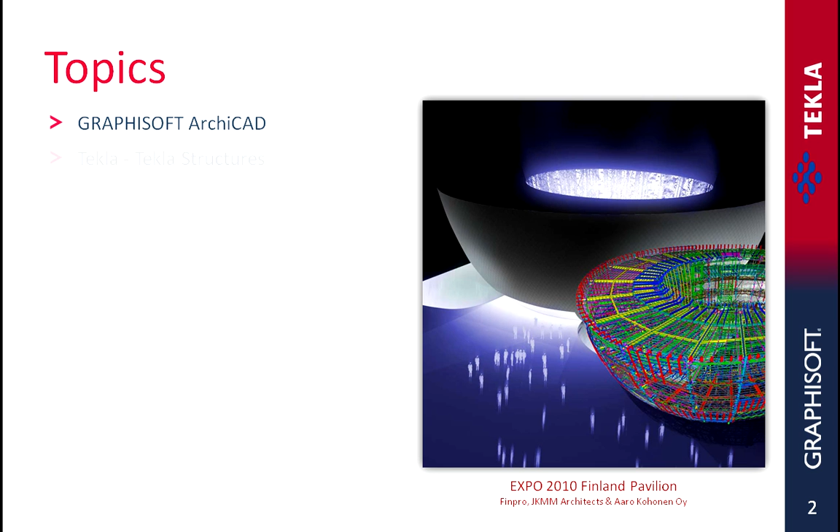Welcome to the GRAPHISOFT Tekla joint presentation. In this presentation, you'll discover how architects and engineers can exchange building design information, share and manage changes, and create professional, fully integrated construction documentation.

GRAPHISOFT ArchiCAD. GRAPHISOFT was founded in 1982, over 25 years ago. ArchiCAD 1.0 previously implemented the virtual building concept. Today, this is known as BIM, that is, Building Information Modeling. Virtual building, or BIM, projects are better designed, more predictable to construct, and less expensive to operate. Over the last 25 years, over 1 million building projects worldwide have been designed and realized using ArchiCAD.

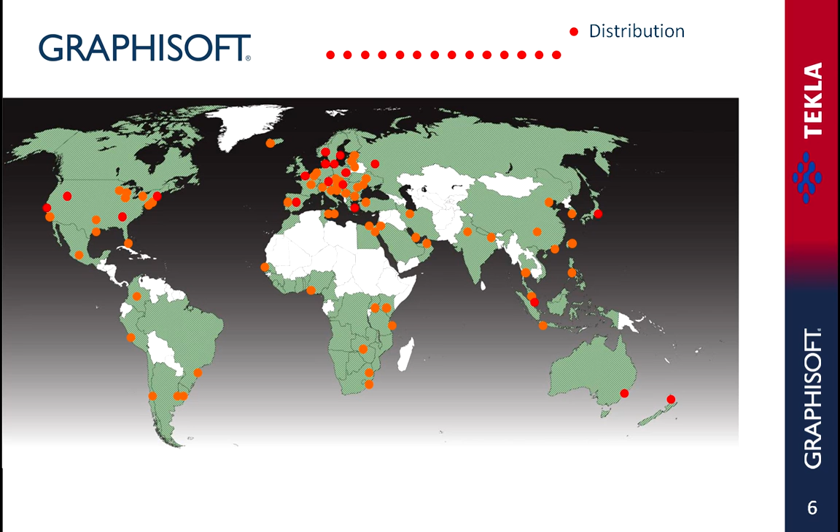GRAPHISOFT is represented worldwide, and ArchiCAD is distributed in 102 countries, is available in 17 languages, and in 25 localized versions. ArchiCAD runs on both Microsoft Windows as well as Apple Macintosh operating systems. We put great effort in providing a high-end software solution for design professionals. ArchiCAD provides fully integrated building information modeling, design evaluation, and documentation workflow.

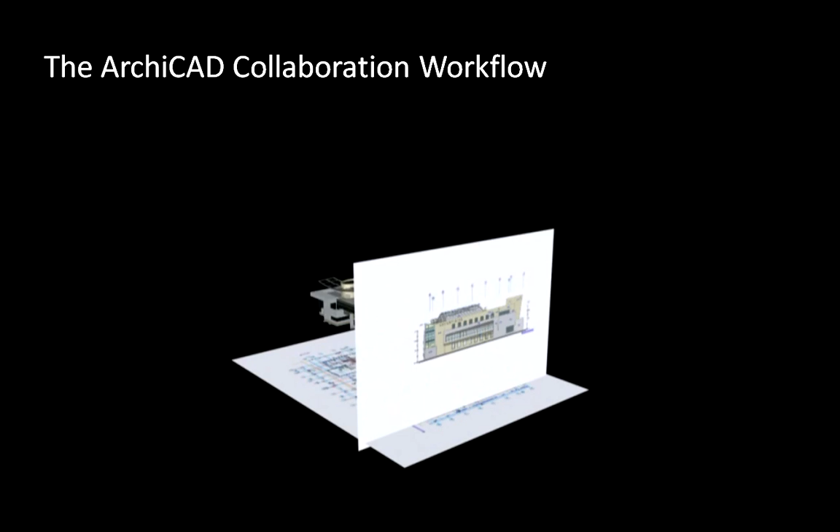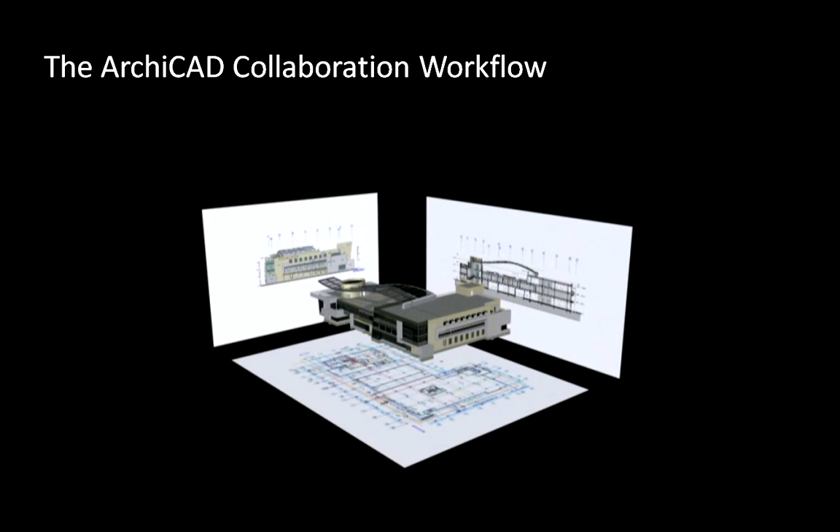Designers using a true BIM, Building Information Modeling, software solution and workflow, will need less time to complete an architectural project. The project will be more consistent than a project using 2D tools. The documentation and coordination issues become almost automatic procedures, and the overall time to market is shorter. Collaboration with engineers will be easier, smoother, and more productive.

Throughout this presentation, we will focus on how designers can work together with engineers and present the design workflow between architects using GRAPHISOFT ArchiCAD and structural engineers using Tekla Structures.

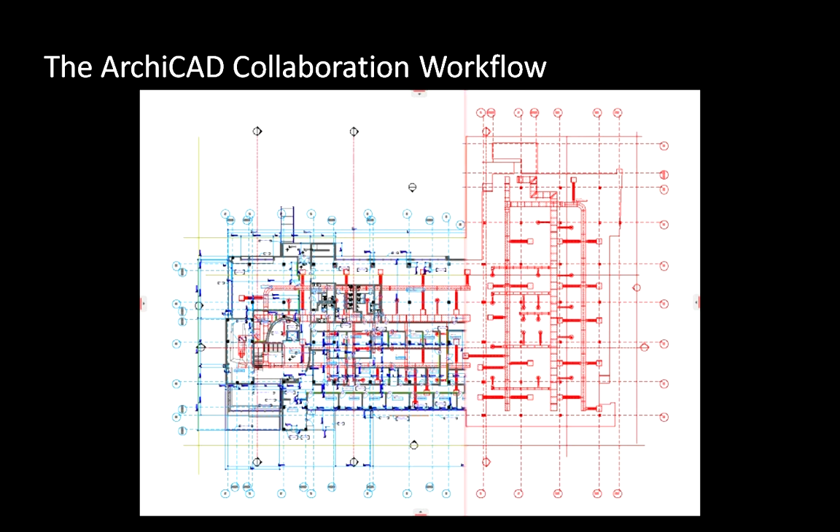Tekla Structures. Tekla Corporation develops and markets software products and related services that make customers' core business processes more effective, enable their further development, and enhance customers' competitiveness. Tekla software products are used in building and construction, energy distribution, and infrastructure management. Tekla Corporation was established in 1966 and has been listed in the Helsinki Stock Exchange since the year 2000.

We employ over 460 professionals globally. Our net sales were over 60 million euros. Over 80% of this sum came from the global market. Tekla software products are sold in the international market to clearly defined customer segments and are meant for professional use. Tekla Corporation is also a global company.

We have offices in 14 countries, have over 30 independent resellers and partner firms, and have customers in over 90 countries around the globe. Tekla software products are available in 13 language versions and in over 30 localized environments for engineers. The ingenuity of Tekla's products is in their model-based technology, and Tekla is an international forerunner in this field. Tekla has decades of experience in select customer industries.

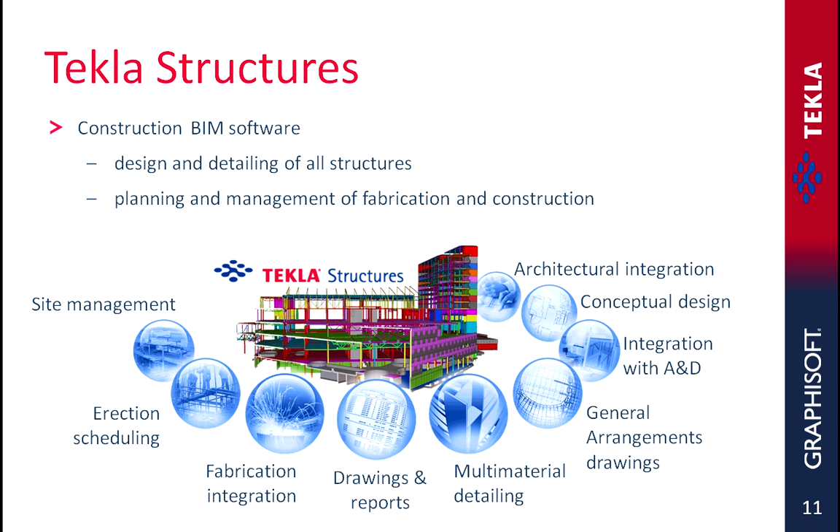Tekla Structures is the first building information modeling, or BIM, software covering the entire structural design process from conceptual design to detailing, fabrication, and construction, as well as the planning and management of fabrication and construction from the structural side. In this presentation, we will focus on the architectural integration and on the site management collaboration aspects of Tekla Structures.

Open-BIM concept. Structural applications have at least one of the following primary functions. Modeling. Modeling applications create the engineering model based on the architectural reference model. This model serves as the basis for analytical and detailing applications. Analysis. Analytical applications do stress displacement calculations. The results will then serve as the basis of the steel reinforced concrete or timber design.

Detailing. Detailing applications develop reinforcement drawings, steel detailing, and usually connect to manufacturing applications such as CNC machines. Tekla Structures is an engineering and multi-material modeling application and provides a complete solution for general contractors. It has both structural modeling and detailing functionality. Tekla also establishes an open, direct interface to connect to local and major analytical applications.

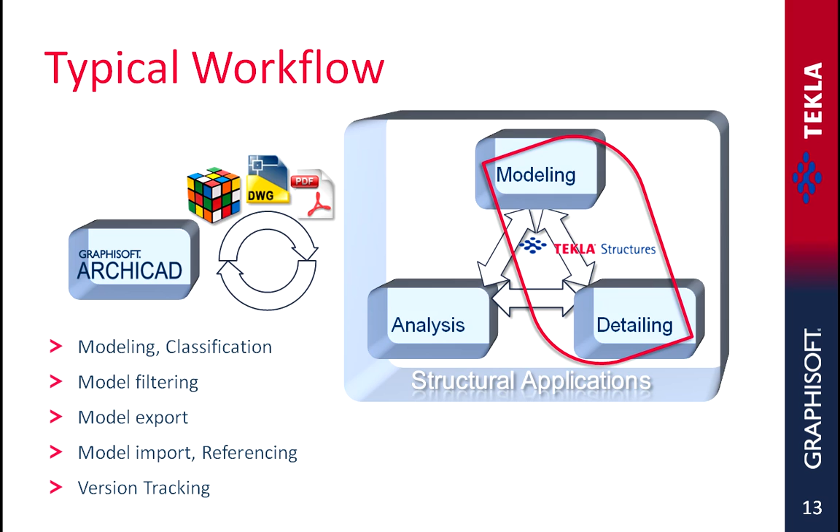The reference model concept is the most important workflow concept used throughout model export and import, as well as change management. Each discipline is responsible for the creation and development of its own model. Reference model means that a discipline, let's say the structural engineer, uses the model of the architectural design for the initial basis of creating the structural model. The structural model will be created as a standalone model, yet some initial design information will be taken from the architectural model. Version tracking or change management can be done for the reference model versions of the various disciplines throughout the design workflow.

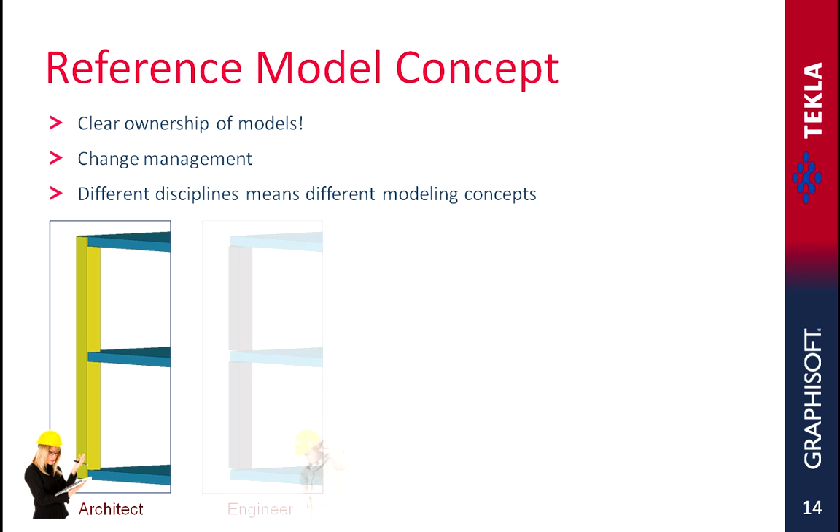Different disciplines, such as architectural and structural, use different design concepts and manners to create their own models. Let's see a quick example to demonstrate the major differences between the modeling concepts of the two disciplines. The architect designs a two-story column as a single continuous column element in the architectural design. The structural engineer will define two separate structural column members in such a design case. Both the analytical and detailing applications need to consider two separate columns as well.

Slabs are also handled in different manners by the disciplines. Architects typically create one single slab that spans across an entire story. Structural engineers divide the single slab into units to comply with various structural requirements and define, for example, hollow core concrete panels.

IFC is an open, intelligent, object-oriented file format. It's used industry-wide as the common platform to exchange building information modeling data between AEC applications for the entire life cycle of the building. Let's review some of the IFC benefits. IFC supports the reference model concept. IFC provides 3D geometry representation for all project elements. IFC also stores standard and custom data about each element, such as materials, profiles, functions, and so on. The applications used by the disciplines can easily and quickly filter and identify relevant discipline-specific information from the IFC database.

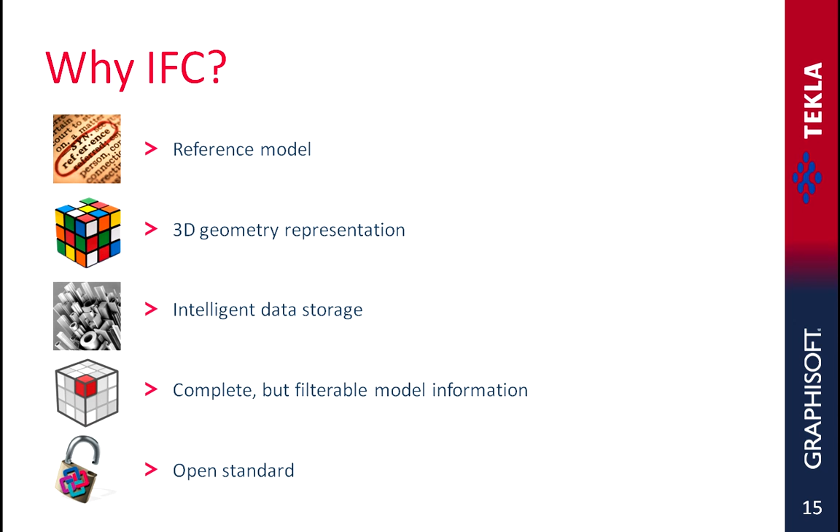IFC is an open standard. All software vendors can build on it or develop it. IFC is used industry-wide as the common platform to exchange building information modeling data between AEC applications for the entire life cycle of the building. GRAPHISOFT and Tekla are members of the Building Smart Association. Both companies have already proven their commitment to open IFC-based BIM collaboration, and they both have the highest IFC certification level. Using IFC for the basis of BIM collaboration, in actuality, means that designers and engineers can collaborate safely and efficiently with other disciplines using other software.

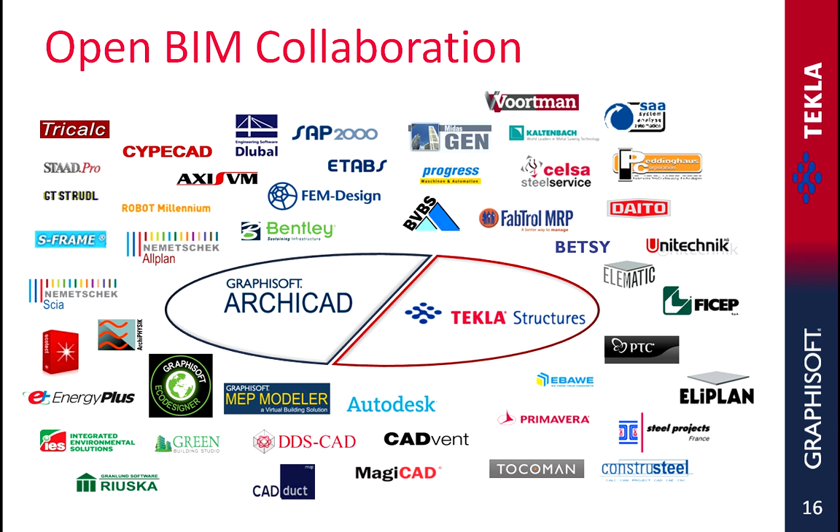On this slide, you can see a collection of design, analytical, structural, mechanical, engineering, plumbing, fabrication, as well as project and construction management applications that ArchiCAD and Tekla users can connect to via IFC or other exchange file formats.

ArchiCAD Tekla Structures Workflow. Before starting the applications, let us briefly overview the main steps of the GRAPHISOFT ArchiCAD and Tekla Structures building design workflow. 1. Let's start with the architectural model. Architects create the first model according to the client's request in the given site. 2. To prepare the model export, architects can filter the structural elements by using element classification, layers, layer combinations, display settings, selection modes, and so on. Of course, the whole building without any filtering can be exported as well. 3. Architects export the filtered model in IFC file format.

4. Engineers receive the architectural model and insert it as a reference. The complete model or elements of selected architectural layers can be imported. 5. Engineers define the structural model and its details based on the referenced architectural model. They can also generate analytical models for analysis applications. Engineers can query the initial profiles and materials defined by the architects. Real Tekla elements can be converted from the referenced beams and columns with the Tekla Object Convert tool.

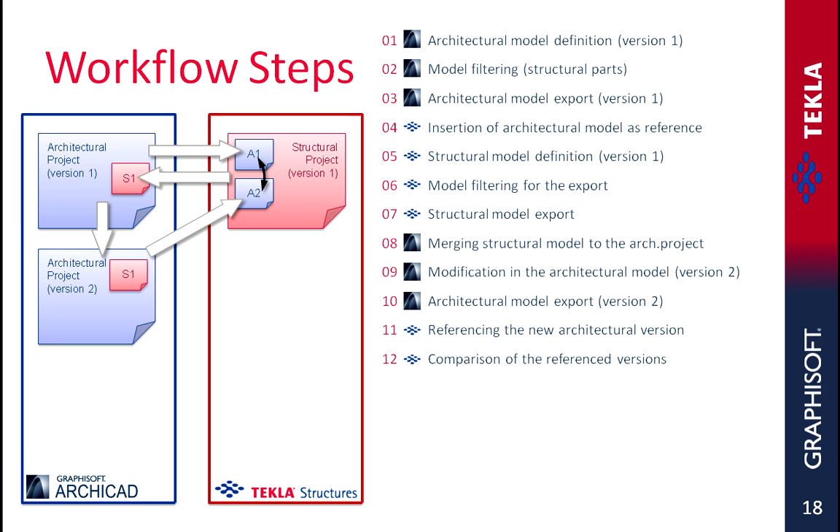11. The new architectural model can be imported to the current Tekla model as a reference, as mentioned previously. 12. The new imported model can be compared with the old architectural reference. The new, deleted, changed, and unchanged elements can be displayed on the screen beside the real structural model. 13. Engineers can make changes in the project according to the results of the comparison process. 14. And engineers send the new structural model version back to the ArchiCAD user.

15. The new IFC file received in ArchiCAD can be compared with the previous structural version. The result of the comparison is listed before merging it into the current running architectural project. 16. The comparison process automatically merges the detected changes only, so the new, modified, and deleted elements will be included as a reference in the architect's running project.

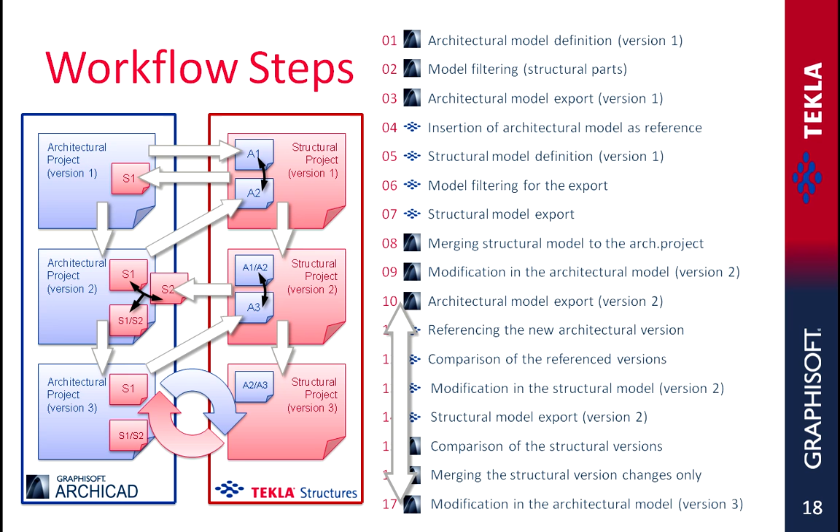17. Architects can easily check the changes recommended by the structural engineer and can make modifications to update the design manually or by using structural elements as real ArchiCAD elements. Both engineers and architects can repeat the previously mentioned model exchange, comparisons, and updates in additional cycles. Finally, the two disciplines make their own or combined documentations.

Let's see the previously described workflow in practice. We will be using a 10,500 square meter office building in our presentation. Exporting the design from ArchiCAD. Let's start with the architectural design model developed in ArchiCAD. For the given site, architects create a design development building model. Let's have a closer view of the building without the environment in the 3D window.

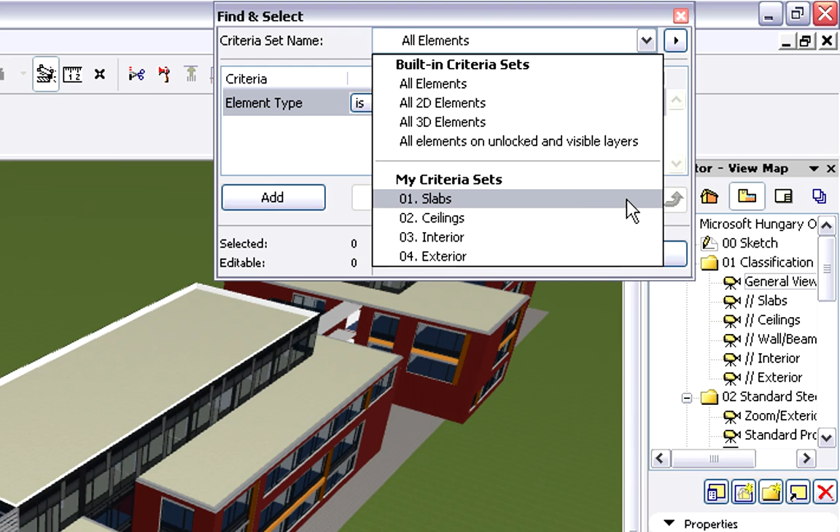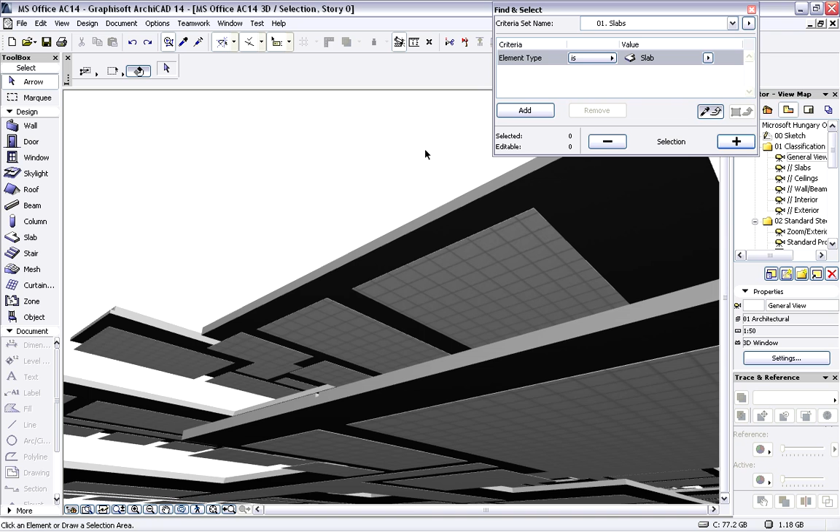Let's filter the elements in the 3D window and display only the slabs of the project. This can be done in seconds with the help of the Find and Select dialog. If we have a closer look at the elements in the 3D window, we will notice that not only the load-bearing slabs, but also the suspended ceilings are displayed. By mistake, the architect did not use the appropriate element classification for the suspended ceilings. So let's correct this now.

We will select all the suspended ceiling elements with the help of Find and Select, and then we will modify their element classification. Let's have a closer look at the Listing and Labeling tab page of the Selection Setting dialog. First, let's choose Ceiling for the IFC element type. Let's also select the non-load-bearing element option for structural function. With these modifications, we have ensured that all ceiling elements in the project are classified as non-load-bearing ceiling elements.

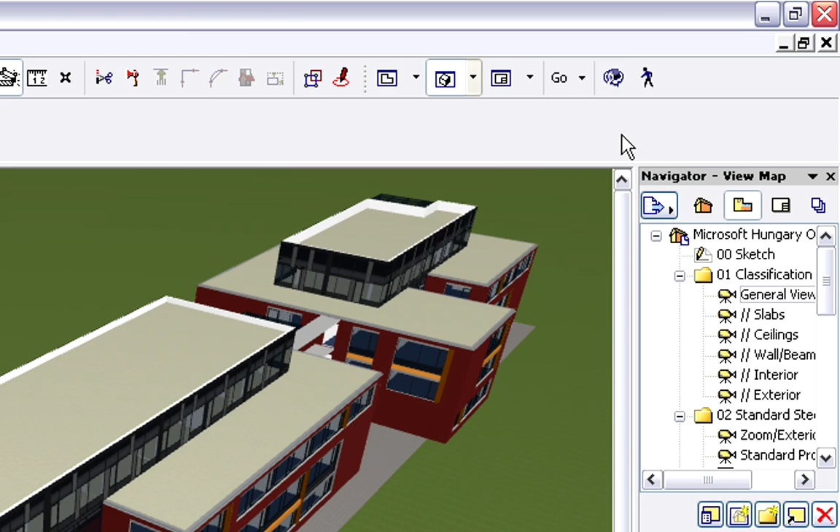Let's display the entire architectural project model again in the 3D window. Now we would like to display the interior elements only. All we need to do is to activate the Find and Select dialog and select elements classified as interior by their position classification. As you can see, only the interior elements, including the previously modified suspended ceiling elements, are visible in the 3D window.

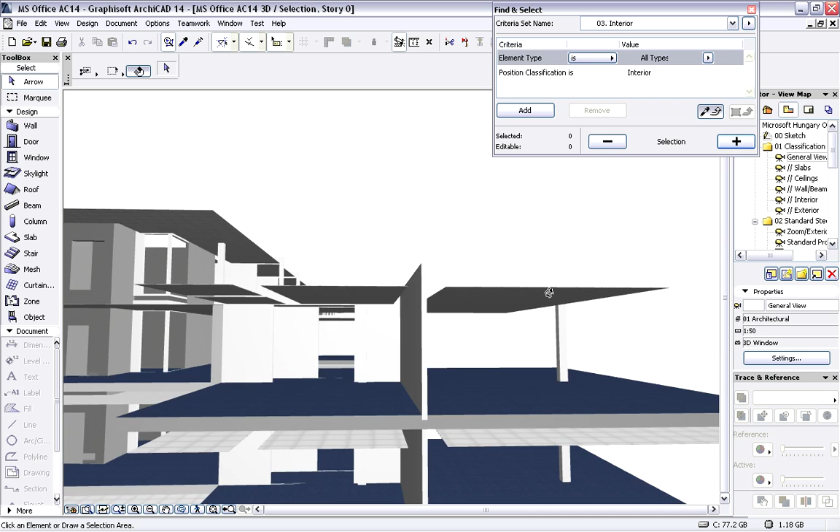Let's now display only the exterior elements. We can do this in the very same manner as before. As you can see, this time, only the building exterior is displayed in the 3D view.

Let's have a closer look at the entrance atrium of the office building. As you can see, this atrium has some steel beams and columns. These steel elements have all been created using standard steel profiles. This is very important since Tekla Structures also uses standard profiles, and these standard steel elements exported from ArchiCAD can be converted to same type native steel elements in Tekla thanks to its Object Converter tool.

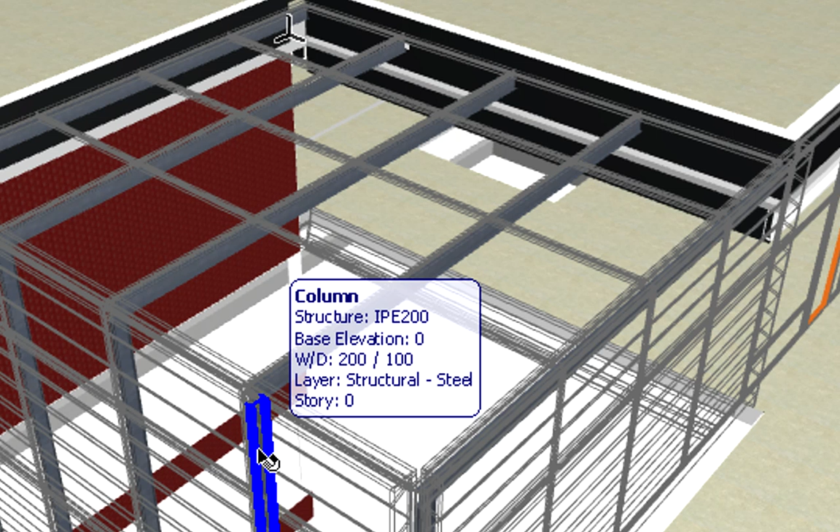Let's select a steel column and open its Settings dialog. As you can see, the profile of the selected steel column was defined as complex structure by using a Eurocode standard steel profile called IPE 200. ArchiCAD enables designers to access thousands of standard steel profiles from a worldwide industry profile database right out of the box. These steel profiles can then be used when placing columns or beams.

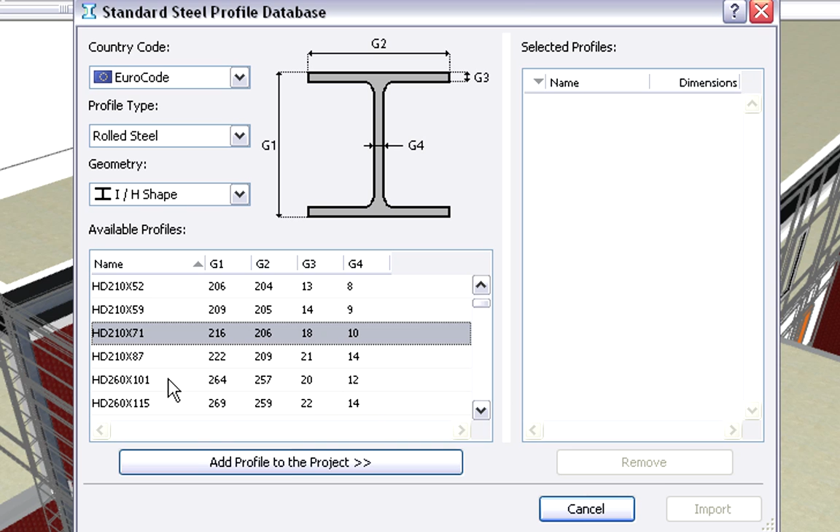The Standard Steel Profile Database dialog helps you select the necessary country code, identify the required profile shape, and its sizes. We are free to select any of the listed profiles. All the selected profiles can then be added to the project with a single click. Let's open the Column Selection Settings dialog again. Please notice that all the previously imported standard steel profiles are available and can be used instantly.

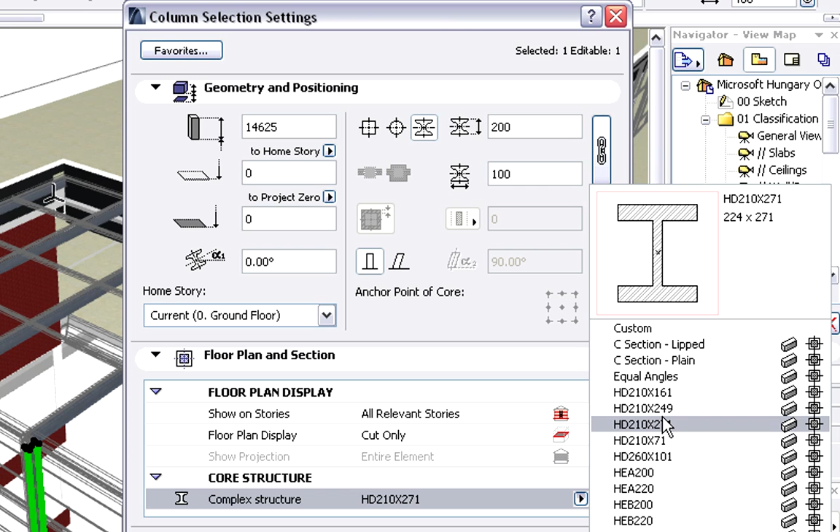As a result, during the data exchange process, structural engineering programs will recognize and identify such standard elements accurately and completely without requiring any adjustments to the settings. With the help of layers and layer combinations, we can store and display the elements having a structural function like load-bearing walls, slabs, columns, beams, roofs, and so on, separately from the other project elements. Please notice that all the structural layers of the project are included in the structural bearing layer combination. Let's activate this layer combination to display only the structural layers in the 3D window.

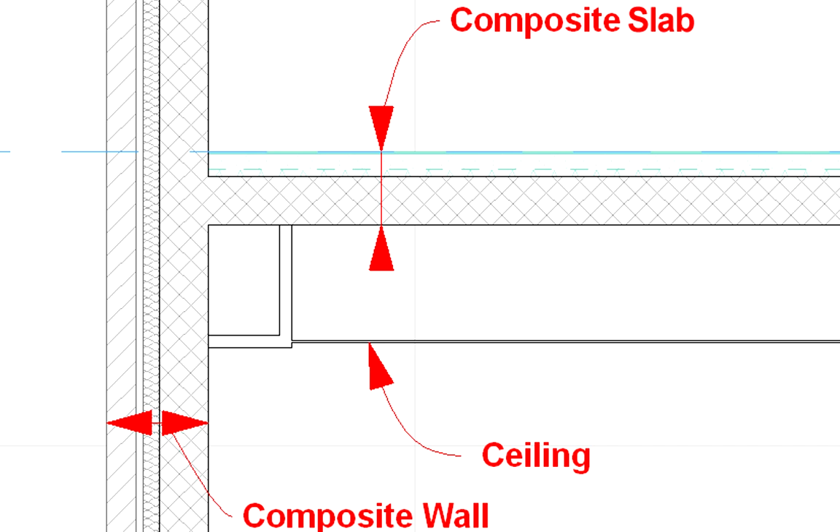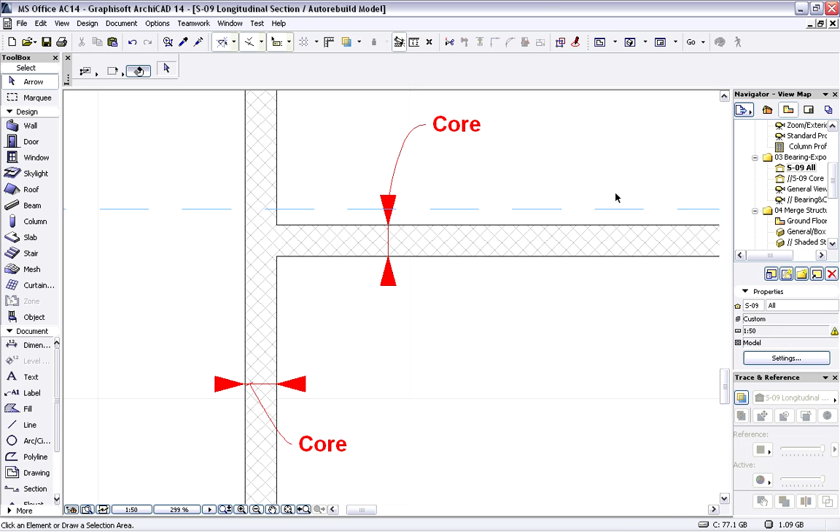Now, let's go back to the entire architectural model and open a section view. As you can see, this view currently displays a wall slab detail. All the composite elements with all their layers, as well as the non-load-bearing ceiling elements, are displayed. Let's now activate the Partial Structure Display dialog to filter the display of elements in the section view. We will select the Core of Load-Bearing Elements Only option. This will ensure that only the elements classified as load-bearing by their function and the core part of composite structures will be displayed. This is also valid for the 3D view of the project.

Let's bring up Partial Structure Display again and choose the Core of Load-Bearing Elements Only display mode for the current 3D window. Thanks to the function classification, the Partial Structure Display feature enables designers to simplify the entire model to just the load-bearing part of the model with only one click.

We will export the IFC database using the elements in the 3D window and send this file to the structural engineer. We can export and send the entire load-bearing structure visible in the current view, or we can filter the exported file by creating a selection set for the export.

For instance, we can use the Find and Select dialog to select all the elements on the steel frame layer. As you can see, all the steel frames are selected in the 3D window. We can use a 3D project view or a floor plan view to create such selection sets.

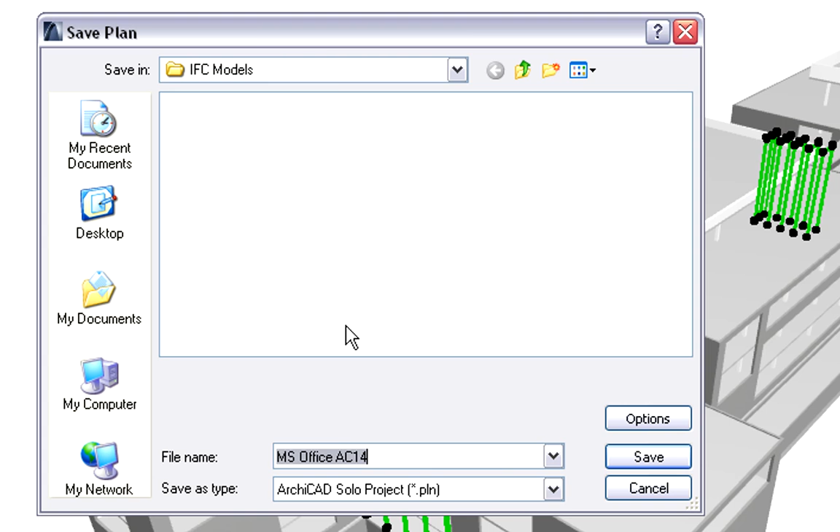Let's activate the File, Save As command. Please note that ArchiCAD supports IFC, IFC XML, as well as their compressed zip file formats. The compressed IFC file formats are handy when dealing with large projects. Now let's select the IFC zip compressed file format.

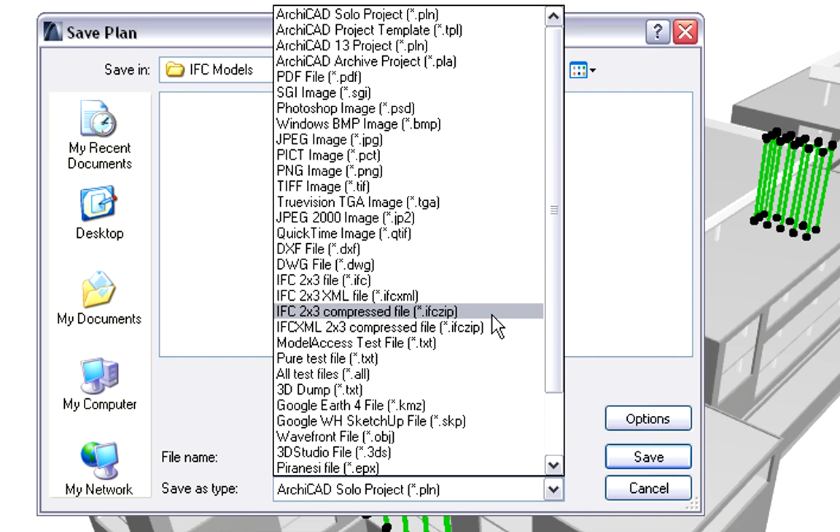Please also note the various export options. As mentioned earlier, we can export the selected elements only, the entire project independent from the visible content of the current view used for the export, or the visible elements on all stories option. Choosing the last export option, only the visible elements of the 3D view will be exported independently from the applied selection set.

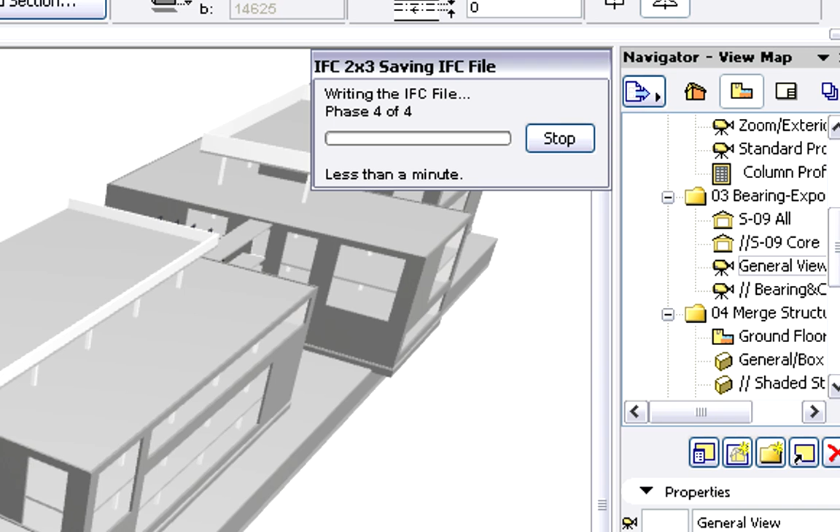For the export translator, we will select one called Data Exchange with Tekla Structures, which is optimized to exchange models with the structural engineer using Tekla Structures. After entering a file name, we can click the Save button to proceed. ArchiCAD will export the IFC project with the previously defined specifications.

Importing the design to Tekla Structures.

Let's see how the structural engineer using Tekla Structures can open the previously saved architectural model and create the structural model. We will insert the architectural model as a reference model. The reference model can be used to overlay the architectural model with the engineer's own model.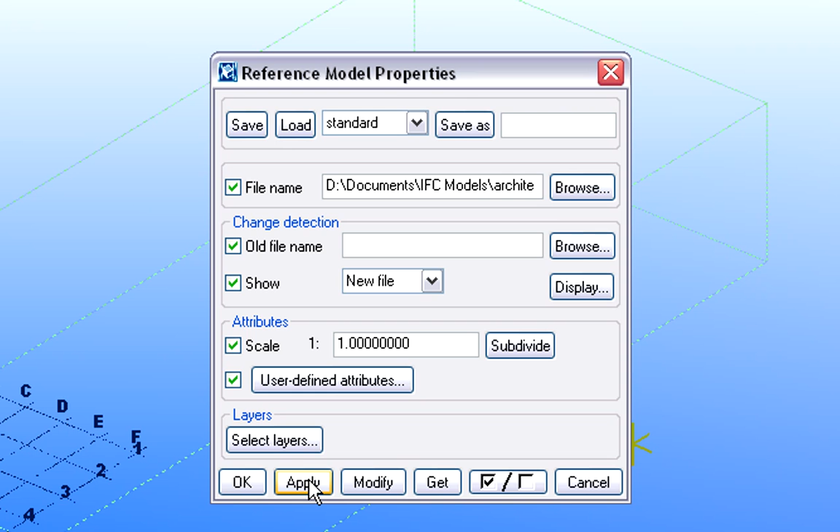At the Reference Model Properties dialog, we will select the previously created IFC file. Please note that Tekla Structures also supports all the IFC file formats, including compressed IFC formats. The engineer can filter the IFC data and select only specific layers to consider. The previously created and exported ArchiCAD layers are visible here and can be used perfectly to filter the IFC data to be used throughout the structural design.

As you can see, Tekla Structures opened the architectural model perfectly. Let's focus on the steel structures of the entrance atrium.

Engineers check the properties of reference objects defined by the architect with the Inquire tool. Let's use the Select Objects in Components command to pick the elements of the reference model and query their properties.

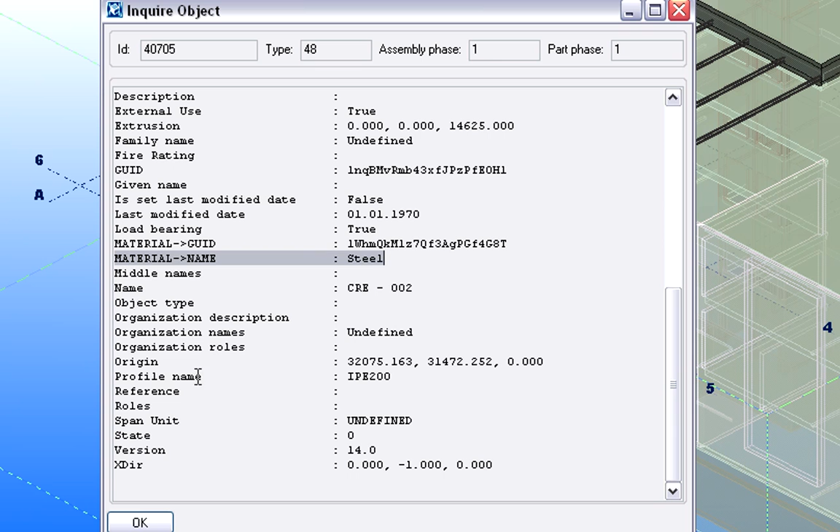Here you can see that the selected steel element was created by ArchiCAD. It was classified as external use and as a load-bearing element. It's generic steel, and its profile name is IPE200.

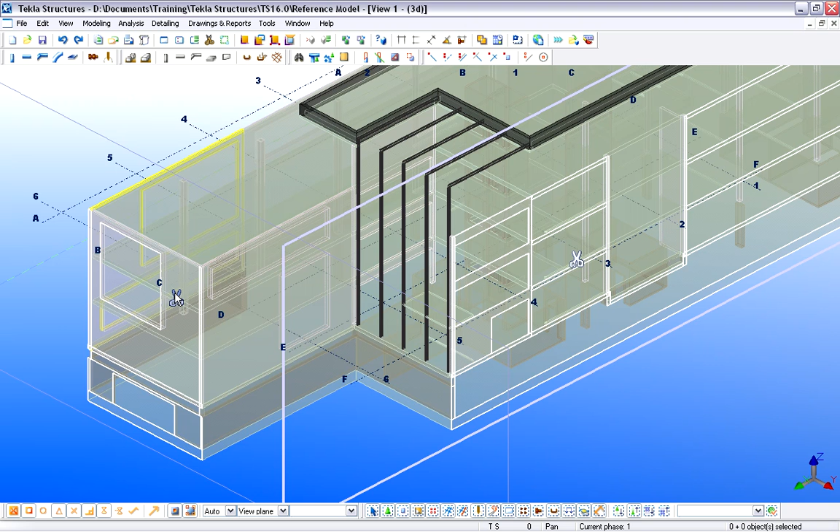Let's create some clip planes to focus on a specific part of the building model. It will be helpful to focus on just the part of the model where we wish to continue working. We will create 2 clip planes and position them so the steel structure of the entrance atrium will be in the center of the 3D view.

Let's continue and create the structural model based on the reference model. Tekla provides various tools to help this work. The referenced steel columns, beams, and bars can be converted to native Tekla Structures elements with the help of the Object Converter.

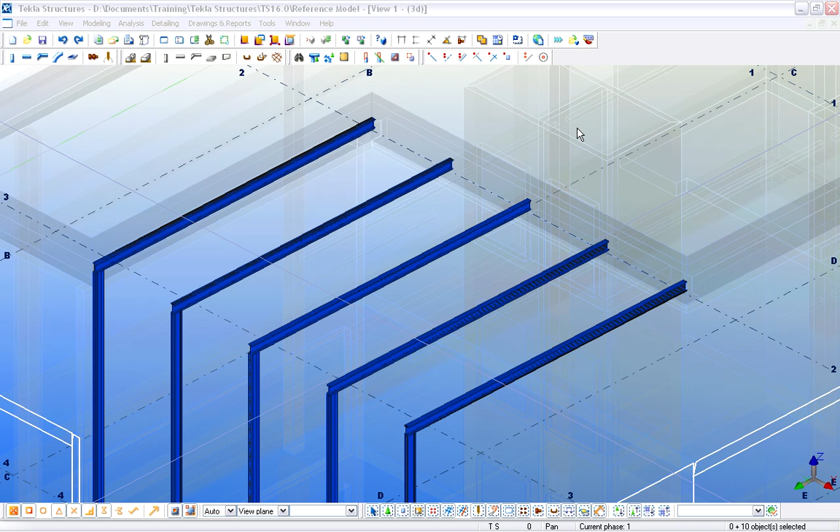After selecting the steel elements in the reference model, we can run the IFC Object Converter from the Macros dialog. The Object Converter generates new steel beams and columns according to the imported IFC profiles and the tool's available profile database. The newly created native Tekla steel elements are displayed in blue.

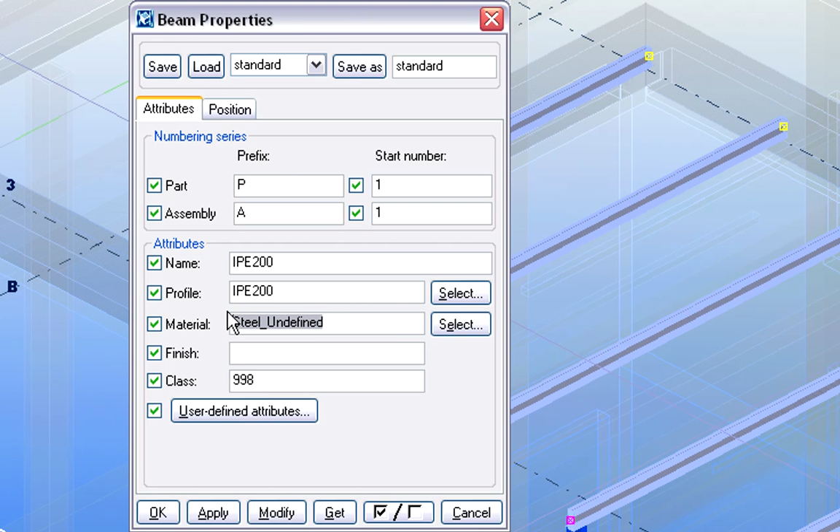Let's have a closer look at the properties of these newly created steel elements. As you can see in the Beam Properties dialog, the profile name of the steel elements is IPE 200, and their material is set to generic steel. Let's edit the material and, for example, select a Eurocode steel grade from the Select Material dialog.

Let's continue and select one of the steel columns. At the Column Properties dialog, we'll modify the steel profile of this column. Let's select HEB 200 for the new standard profile. Let's also change the steel material of this column with the help of the material database.

We will create a new concrete beam based on the geometry of the architectural reference model.

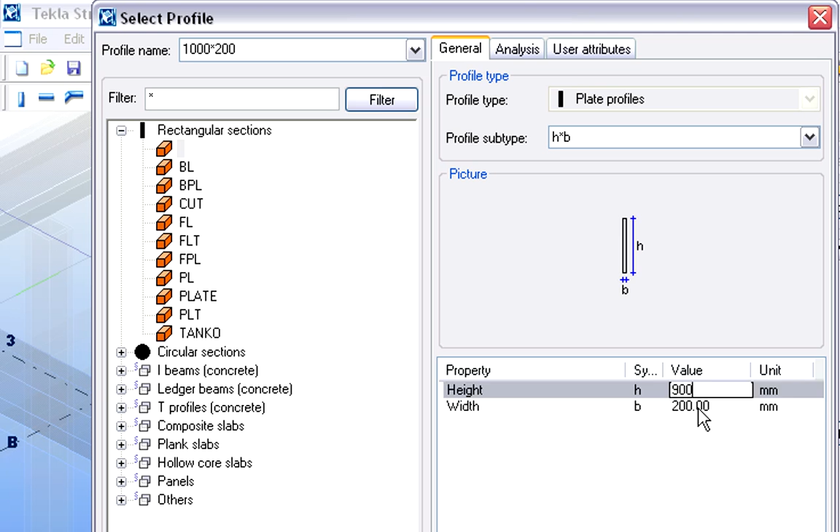Let's start by defining the properties of the concrete beam. Let's set the height as well as width values of the concrete cross-section. Let's also select a standard concrete grade for the new beam.

We can also set the position and the location of the reference line of the concrete beam if necessary. The position of the reference line will define the start and end point of the new beam according to the referenced one.

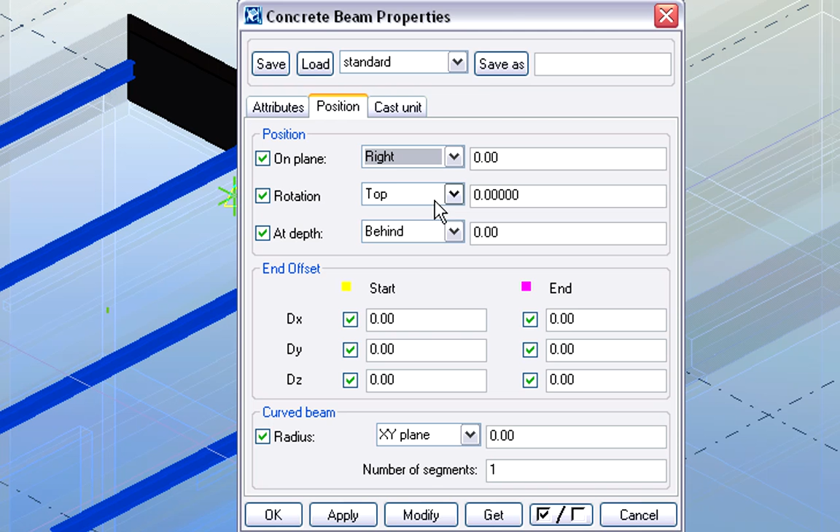Finally, let's proceed and create the new beam with the previously defined properties. As you can see, the newly created concrete beam is indicated in yellow in the 3D window.

Let's continue and create a new concrete wall panel. We can start by setting the shape, as well as the material attributes of the wall panel if we wish. Let's create a new concrete wall panel with the help of the reference model. However, this time, we will create a higher wall panel than modeled in the reference model.

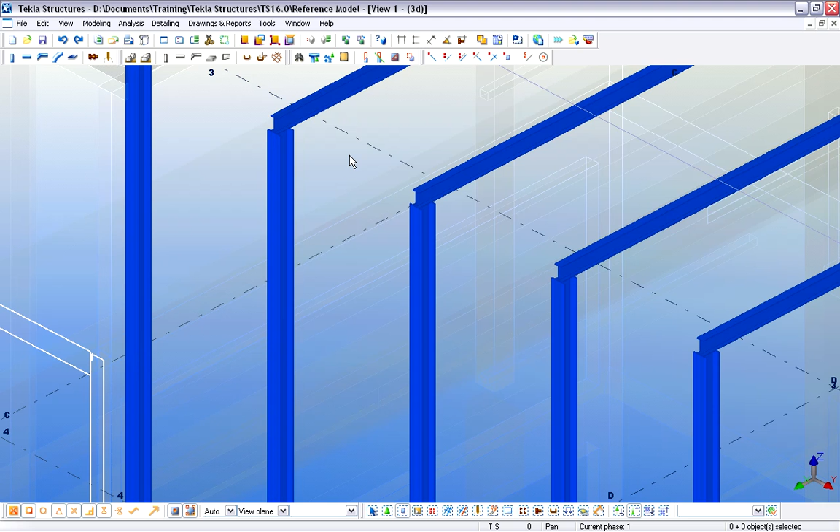Let's continue the work and add structural details to the design. We can use Tekla's component catalog to start. This catalog already contains numerous predefined structural detail templates. However, we can also create new ones if necessary.

Let's select Favorites for now, in which the most frequently used components and company standards can be collected. Let's select a steel column, steel beam component from the Favorites, and apply this to the project. As you can see, the result is immediately visible in the 3D view.

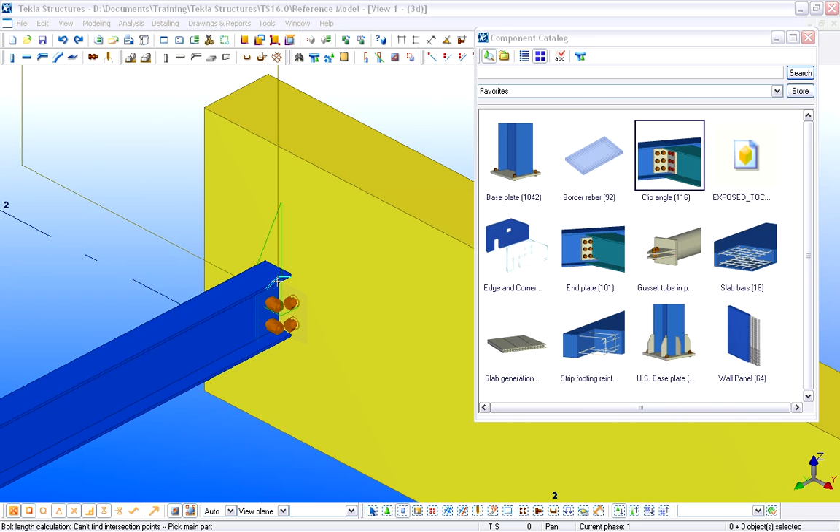Let's select a clip angle from the component favorites. We will add this to the junction of the steel beam and the concrete beam at the top of the atrium. As you can see, the new structural detail is instantly visible in 3D.

Let's select a base plate in the component catalog. We will apply this at the junction of the steel columns and the concrete wall underneath. Let's review the parameters of this component.

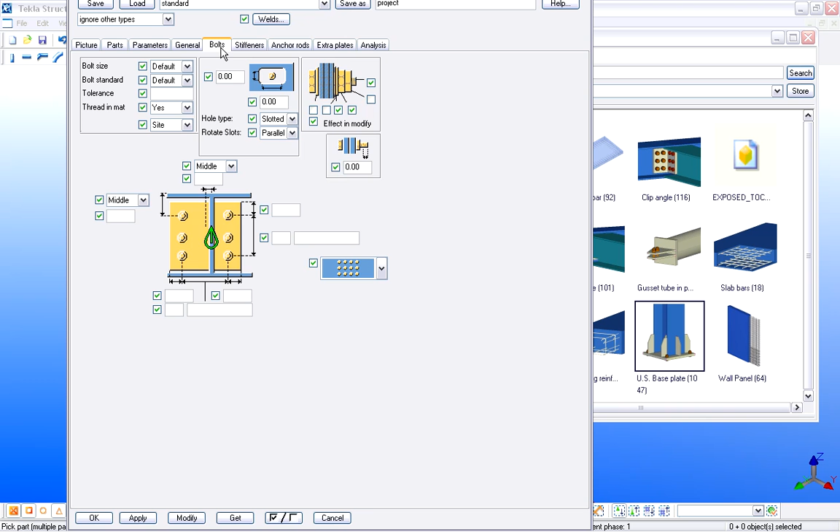Tekla Structures provides various customizable properties for all components. We can freely edit all the dimensions of the component parts. Let's proceed and add the base plate component to the project.

Let's select the wall panel reinforcement component from the catalog. We will apply this component to place reinforcement mesh into the concrete wall panel below the steel columns.

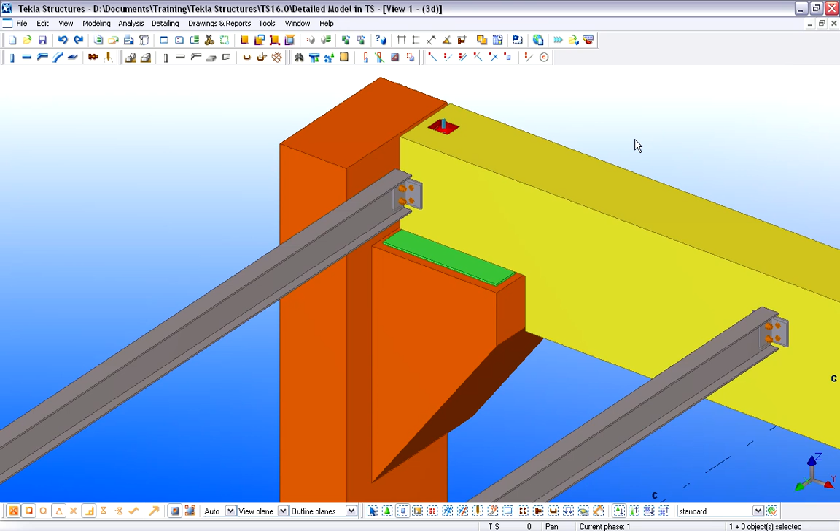The structural engineer continues the work. Here you can see the completed structural model of the atrium entrance. Please note the level as well as the precision of the structural details. Even the reinforcement bars are visible in the reinforced concrete structures.

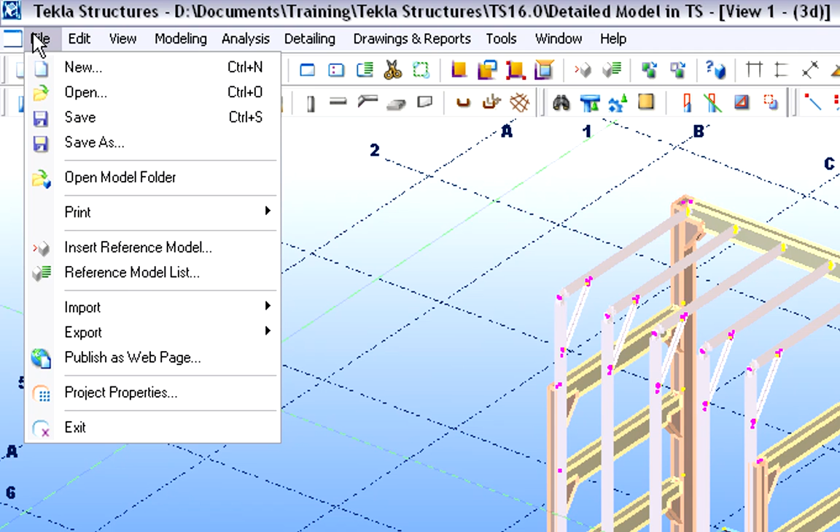Let's hide the architectural reference model for now to get a clear view of the structural design. We will select and export the structural model of the atrium in IFC format and send it back to the architect. At the Tekla Structures IFC export dialog, we can fine-tune and define the IFC characteristics of the exported data.

We can select the compressed IFC file format. We can decide if we wish to include the previously created assemblies, bolts, or reinforcing bars in the exported IFC file.

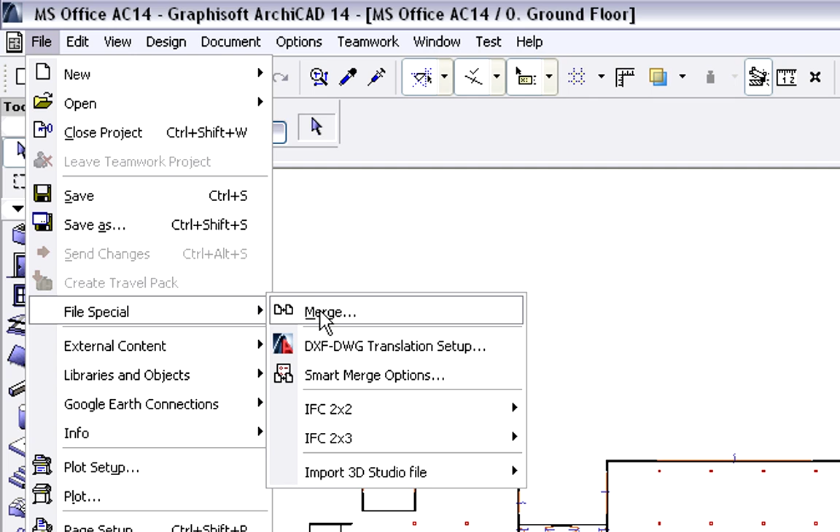Merging the structural model to ArchiCAD. Let's switch to ArchiCAD and merge the structural model to the architectural project. The IFC file received from Tekla Structures can be opened as a new project, or can be merged into a running architectural project. Let's see how the architects can merge the structural IFC model to their own running project.

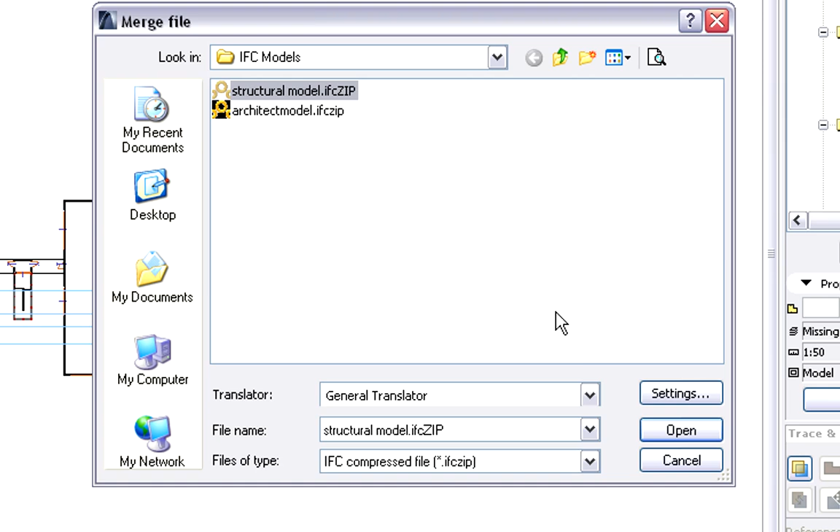Set the file type to IFC compressed file and browse for the IFC file created by the structural engineer. At the translator, specify the data exchange with Tekla Structures translator file. Let's open the settings dialog of this translator to briefly review its characteristics.

At the Import Options page of the Translator Setup dialog, we can define the layers we wish to use when merging the structural elements. The default settings of the selected translator add the Tekla extension to the layer names where we merge the structural elements. By default, the layers are locked to be protected against further accidental changes.

We can also use custom material conversion tables when merging the structural elements. The Conversion Table dialog displays how the materials defined in Tekla Structures will be converted to ArchiCAD fill types by default. Of course, the conversion table can be edited and customized for our current ArchiCAD project.

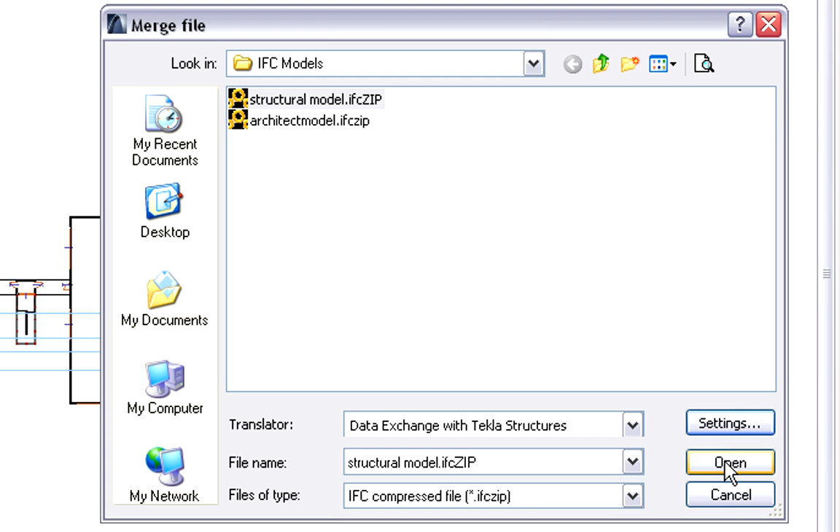Let's continue the merging process by clicking Open. The Model Filter dialog will be displayed automatically. Here we can filter the imported structural model. For instance, with columns, we can filter the column types we wish to merge to the project and so on. We will merge all elements and element types in our case.

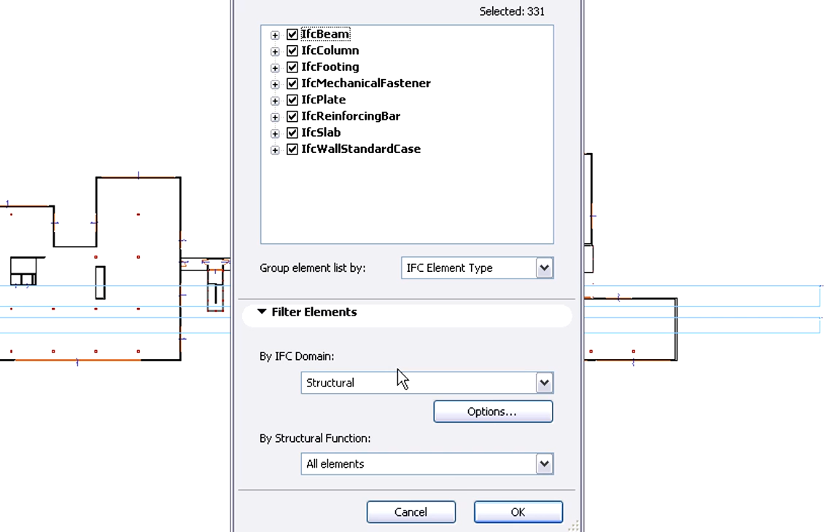ArchiCAD will merge the structural elements. Let's have a look at the results in the 3D window.

Let's open the Layer Settings dialog. We will display all architectural elements in wireframe mode, and all imported structural elements located on the locked layer with the Tekla extension in shaded mode.

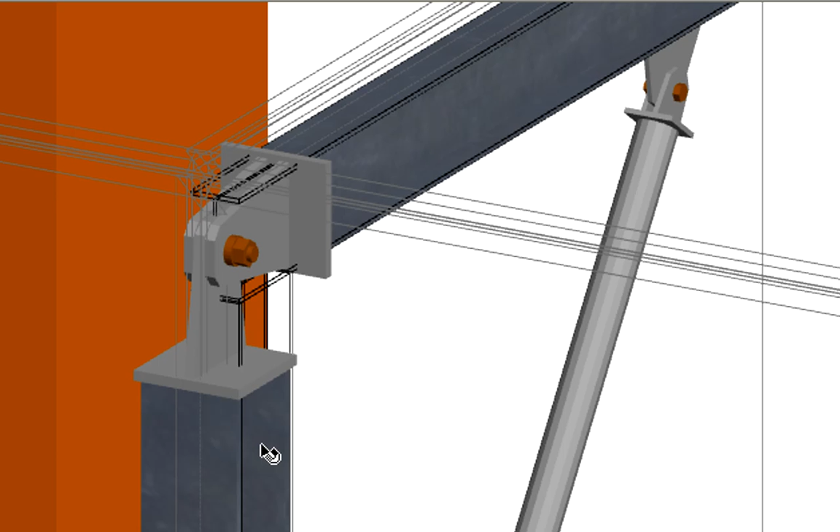Let's have a closer look at the entrance atrium which was created in Tekla Structures. As you can see, the horizontal steel beam is an IPE 200 standard section. The vertical steel column is the modified HEB 200 profile, as we defined in Tekla Structures.

Please note that all the steel structural details and components are clearly visible in ArchiCAD. The material specifications are also correctly merged with the structural design.

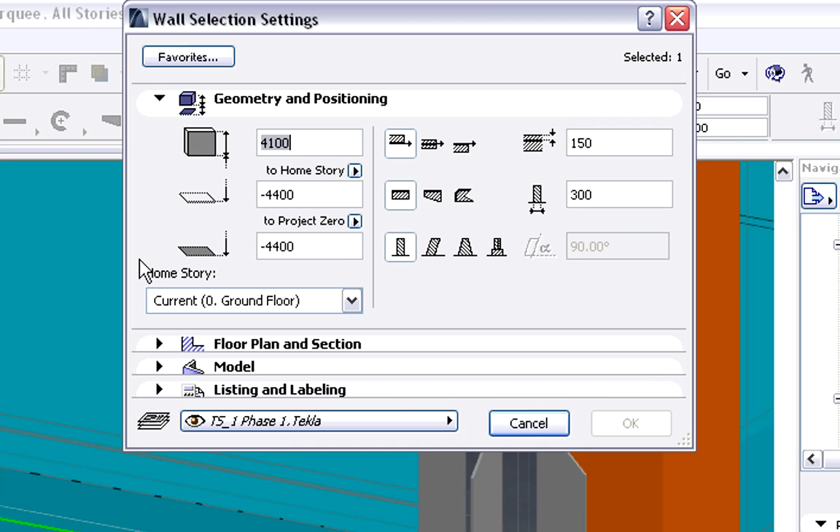Let's select the concrete wall panel and open its settings dialog. Please note that due to the previously defined material conversion, the name of the structural material corresponds to the material name defined in Tekla Structures. But the cut fill of this material has changed to the ArchiCAD fill, as defined at the Material Conversion dialog.

Let's make the reinforced concrete structures transparent for now, so that we can have a close look at the reinforcing bars created in Tekla Structures.

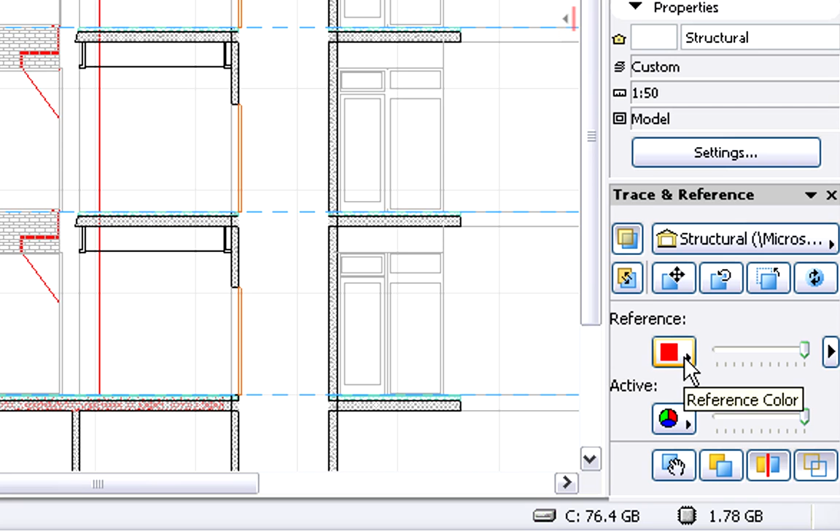Let's display the entrance atrium in a section view in ArchiCAD. Let's display the previously merged structural design as a trace reference in this section view. We can change the color of the traced elements if we wish.

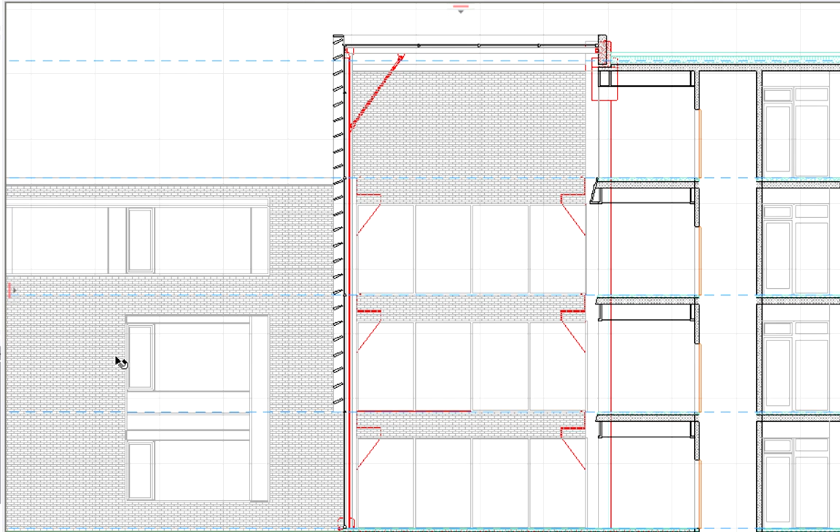ArchiCAD's virtual trace features enable designers to simultaneously view and visually compare elements of the active and traced views. In this way, even the smallest differences can be easily spotted and quickly identified. Here we can see the architectural model as the active view and the merged structural design as the traced view.

Tracking changes. Let's briefly explore how the architect and the structural engineer can identify and manage changes in the different design models. First, the architect will modify the design in ArchiCAD.

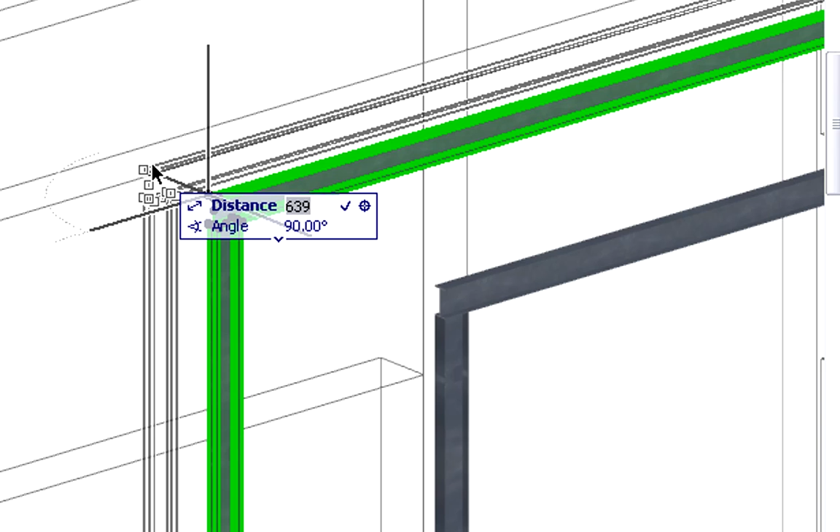Let's delete the middle steel beam and column at the entrance atrium. We will also modify the position of the next steel frame, dragging both the steel column and beam 1,500 millimeters.

Finally, we will export the updated architectural design as an IFC database and send it to the structural engineer. Let's switch to Tekla Structures now.

The structural engineer can compare the new and old versions of the architectural model. The engineers can insert the changed architectural model as a reference into the running structural project, as introduced earlier. Let's browse for the new IFC file and place it into the structural project.

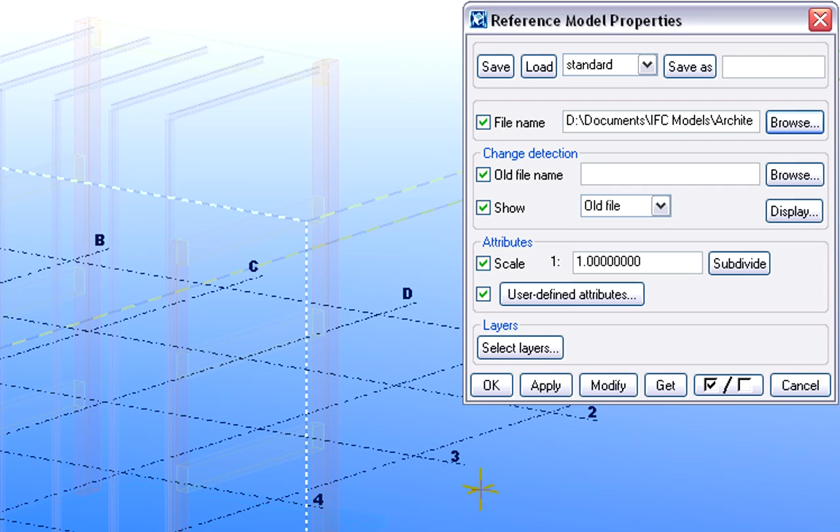The newly imported elements are shown in dark colors. Now let's browse for the IFC file representing the latest stage of the design and compare this with the previous stage.

At the Change Detection page of the Reference Model Properties dialog, we have various options. From a drop-down list, we can select what to display on the screen regarding the results of the comparison. We can select to show only the new file or the old file, or display the unchanged, changed, deleted, or inserted new elements.

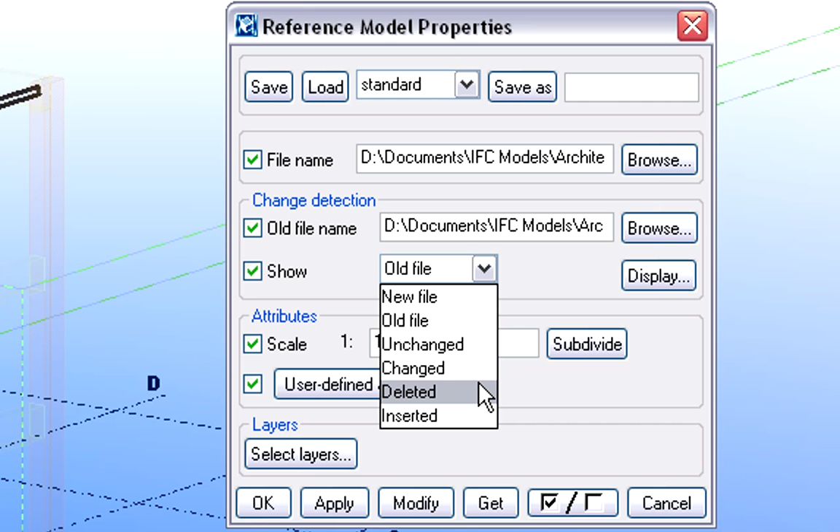Now we will display only the deleted elements first. As you can see, only the middle steel frame is now displayed on the screen, which was deleted by the architect earlier. Let's display the changed elements now.

As you can see, the other steel frame that was moved by the architect is now displayed. Finally, let's display the new file, only to see how the updated architectural design looks.

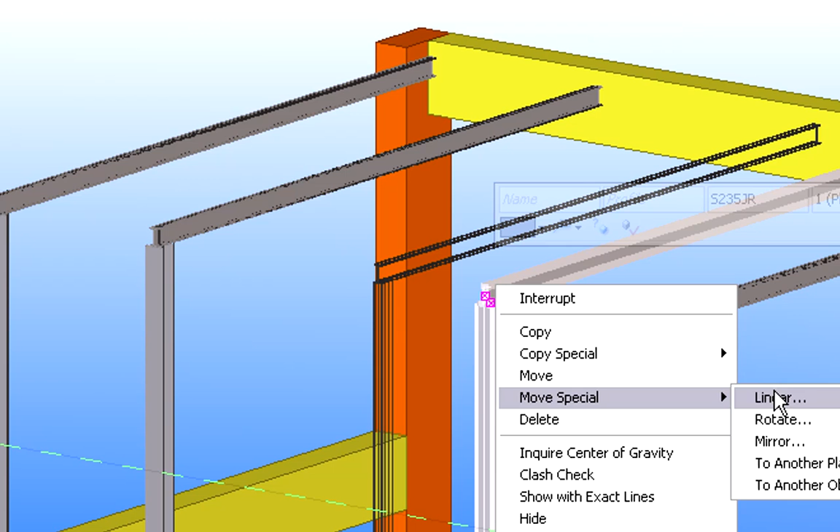Let's continue and update the structural design based on the inserted architectural reference model that displays the latest design stage. First, we will delete the middle steel frame in the structural model. Then, we will modify the position of the other steel frame. The new position of this frame will be based on the frame in the architectural reference model.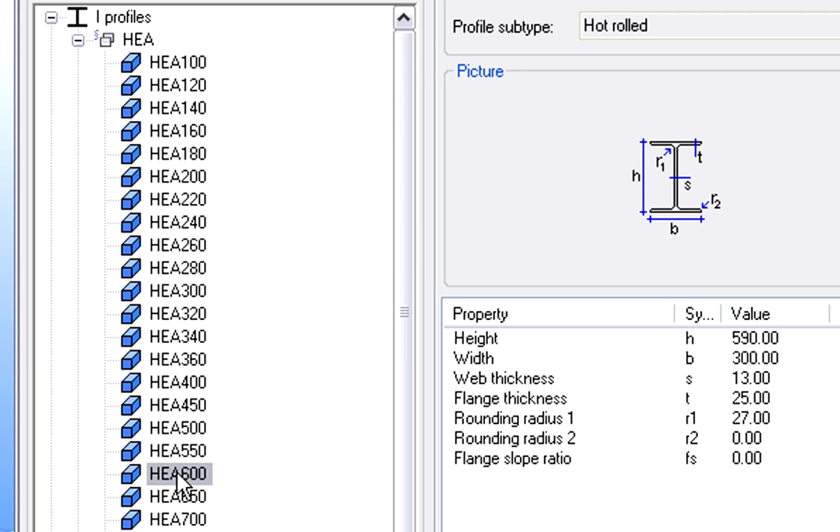Finally, we will also place a new horizontal steel beam in the structural project as a suggestion to give the correct stiffness of the modified state. We will select, for example, a Eurocode standard HEA 600 steel profile from the database. The new horizontal steel beam will be placed at the junction of the existing steel columns and beams.

Let's now export the updated structural design in IFC file format and send it to the architect. Let's switch to ArchiCAD now and see how the architect can manage the structural design changes.

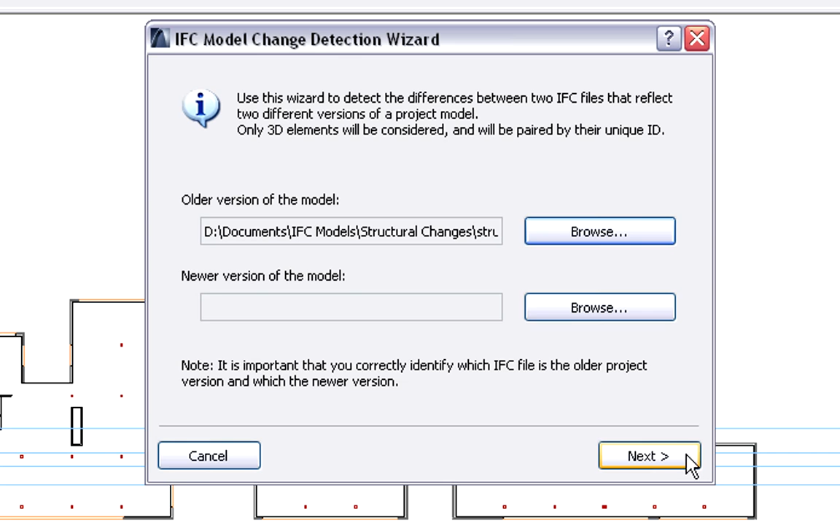We will activate now the File, File Special, IFC 2x3, Detect IFC Model Changes menu command. The IFC Change Detection Wizard will guide us through the necessary steps. First, we have to specify the old version of the structural model. Then, we also have to specify the new version of the structural model.

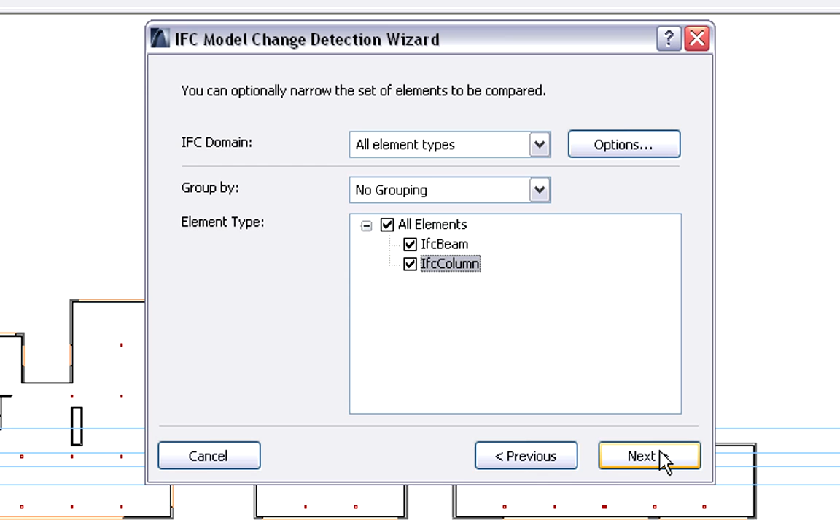We can define the elements we wish to compare in the change detection process. For now, we will compare all element types. As you can see, ArchiCAD already displays the number of new, modified, and deleted elements prior to merging the IFC model changes to just the current architectural project.

Here we can also specify layers we wish to use to merge the compared version elements. Finally, we can click the Merge button to proceed. In just a few seconds, ArchiCAD will merge only the changes of the IFC model versions and display the Markup Tools palette. This palette already lists all the model changes with color codes.

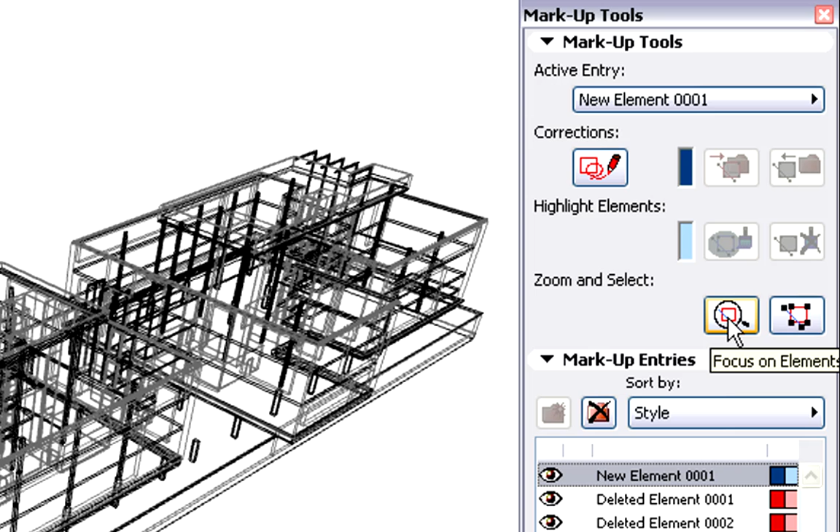Let's select the first entry in the markup list. This is a new element and it's identified in blue. We can zoom in to this element. As you can see, this is the horizontal steel beam created earlier by the structural engineer.

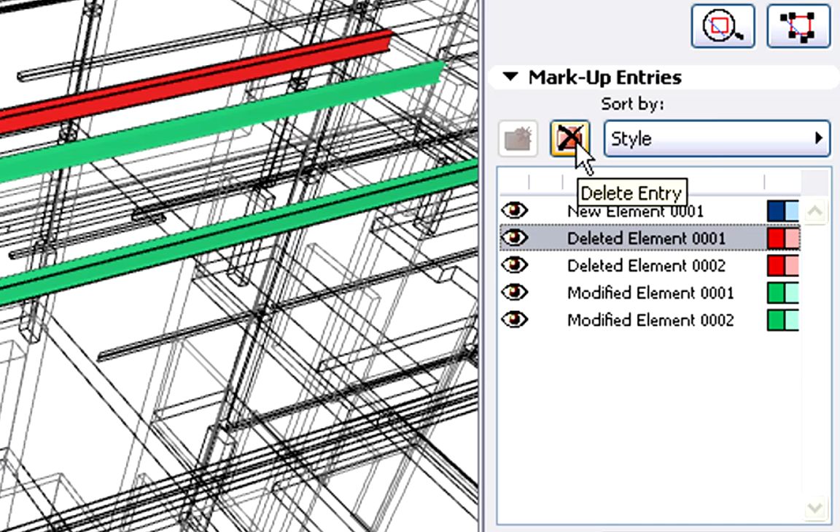Let's select the second deleted element indicated in red. This is the middle steel column which has been deleted from the project. Let's delete this markup entry. ArchiCAD will offer to delete the corresponding elements with the markup entry. Let's select and delete the next markup entry, representing the deleted middle steel beam.

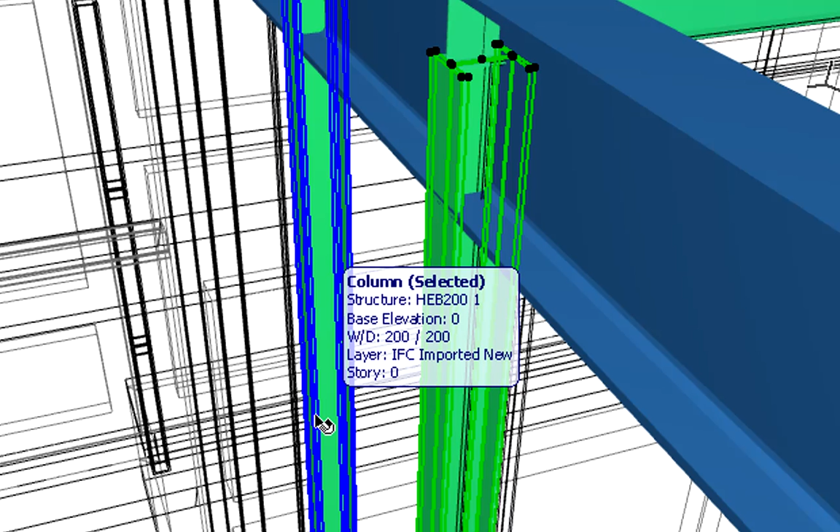Let's select the next modified steel column elements shown in green. Let's zoom in and select these modified columns. When we hover the mouse over the selected columns, ArchiCAD will display the layer of the selected element in the Info tag. The column placed on the IFC imported old layer represents the previous position of the column. The column placed on the IFC imported new displays the new position of the column. Based on this information, we can decide on the next design steps.

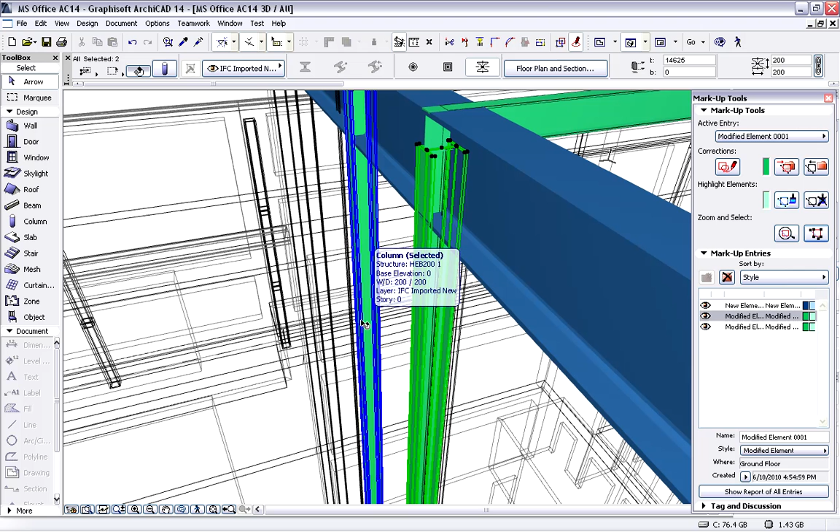As you can see, GRAPHISOFT ArchiCAD and Tekla Structures provide a complete, integrated, best-in-class design workflow. ArchiCAD and Tekla Structures together bridge the different requirements for the BIM models of architects and engineers and realize the Open-BIM approach for this practice, greatly broadening designers' options for real integrated project delivery.

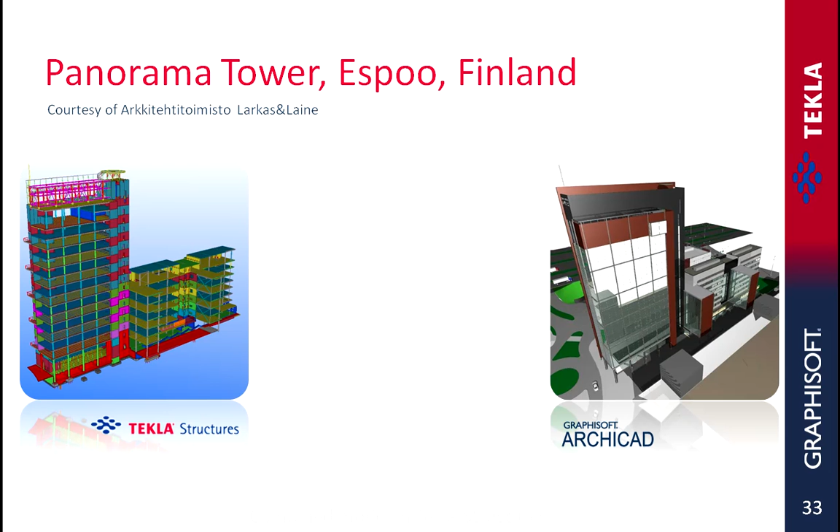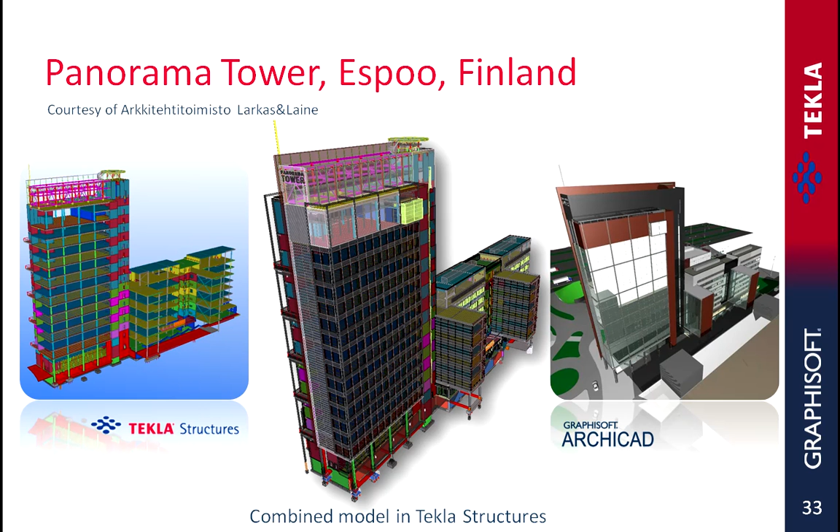Here you can see the combined architectural and structural building information as one single model file. It's important to emphasize that even though both architectural and structural models contain a high level of detail, the file size of the model remains small and therefore very manageable as one single project file.

Let's take a very quick look at some other projects as well. All these projects have been designed by other architectural and engineering teams, but they all share some common aspects. The architects used GRAPHISOFT ArchiCAD to create and develop the architectural design, and the structural engineers used Tekla Structures to create the structural schemes. The architectural and structural teams implemented the previously described IFC-based Open-BIM collaboration workflow.

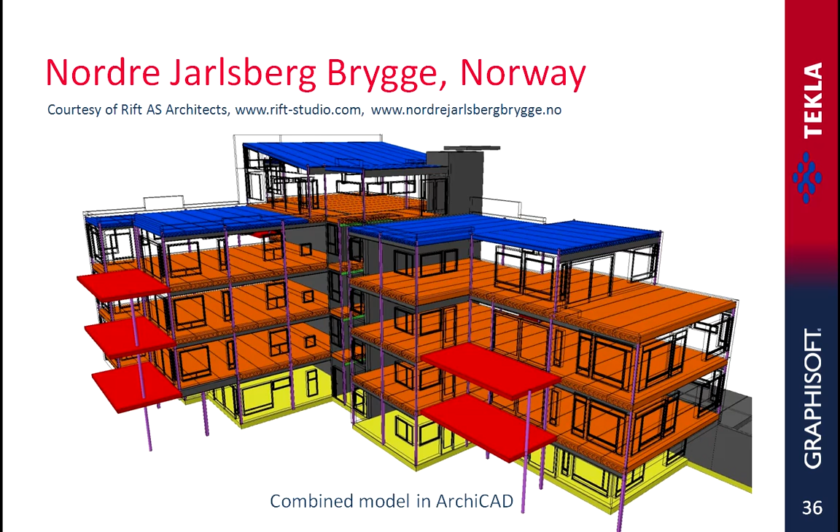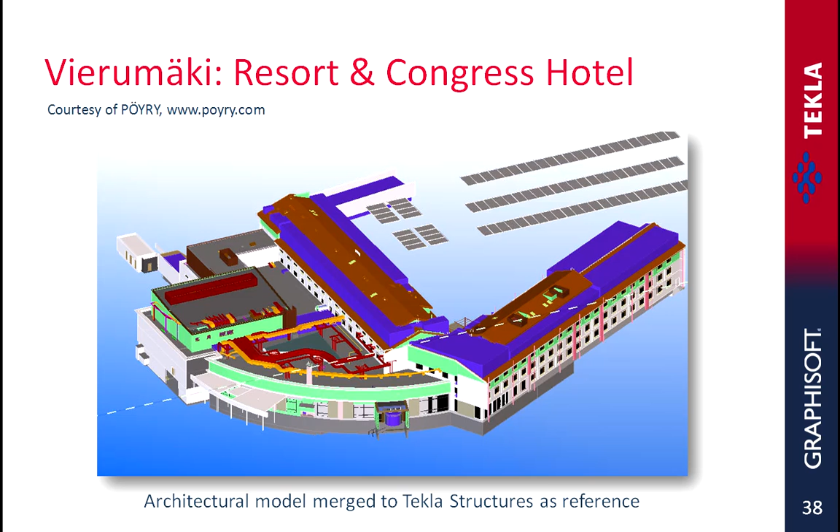Vierumäki Congress Center is located next to Finland's largest sports academy. The center hosts over 400,000 people per year. Pöyry provided the design development as a Pöyry integrated design and delivery service from the early sketches to the full BIM model. The total time from planning to ready building on site took less than 18 months. The in-house merged model served as essential aid for multidiscipline design coordination.

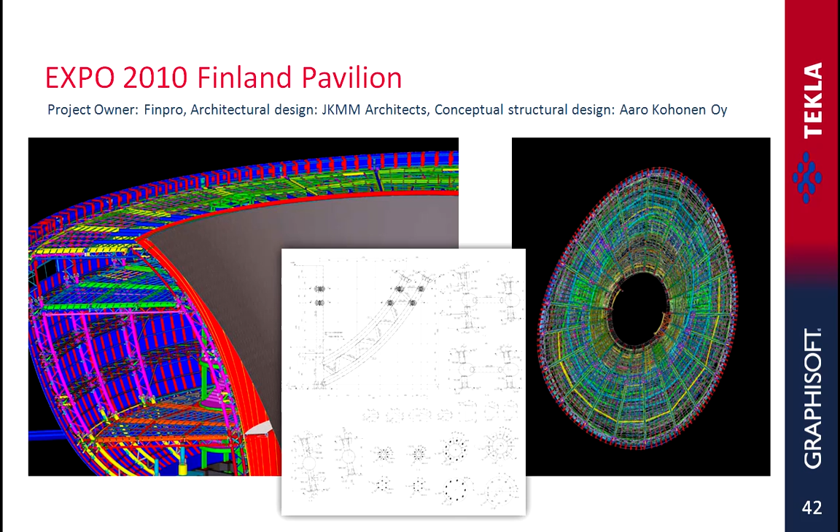Finland's pavilion for the Shanghai World Expo 2010 is called Kirnu, or Giant's Kettle. The Kirnu Pavilion is a laboratory for sustainable building, presenting finished solutions for future urban construction. The construction materials and methods have been selected so that construction generates as few greenhouse gas emissions as possible, and the building will be easy to disassemble and rebuild after the expo.

We hope that you found this presentation useful and that you'll share the opinion of architects and engineers: Open-BIM collaboration is the future of the AEC industry.